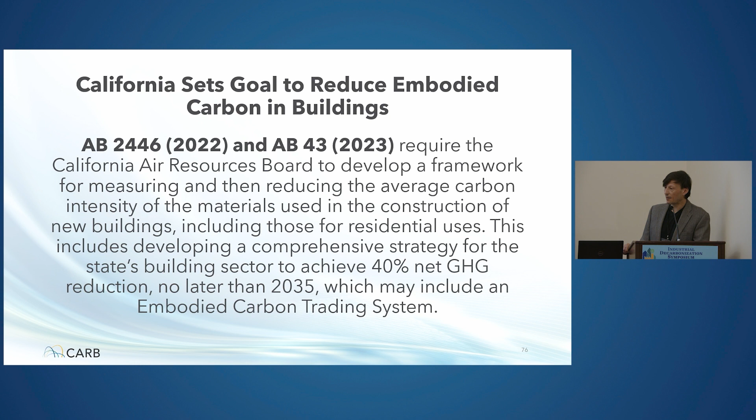In the last 2 years, the legislature passed 2 bills which created some broad authority and goals for the California Air Resources Board to develop a framework for measuring and then reducing the carbon intensity of building materials across the state. As part of these legislative mandates, it includes a target for a 40% net reduction in greenhouse gas emissions no later than 2035. Some pretty ambitious goals that we're currently looking to implement.

California has adopted a number of ambitious goals for reducing greenhouse gas emissions, and these trace back to landmark bills, Assembly Bill 32 and Senate Bill 32, which were signed in 2006. Recently, there has been direction from the legislature to develop strategies and approaches to reduce emissions affiliated with building materials and the built environment, which includes Senate Bill 596, the net zero emission strategy for the cement sector, which I believe one of my colleagues will be talking about at a later session.

In general, just to ensure that these long-lived products and materials are selected based on low carbon aspirations. So I'll give a quick update.

We're developing a team at CARB right now to implement the goals of AB 43. We have had 2 new sections created at CARB, and I'm the lead staff in one of those. We're in the process of recruiting and staffing right now, so we're just building up this spring since we've started hiring in this direction.

We're currently developing a reporting tool which aims to collect data on building materials and carbon intensities, as well as other data on construction activities statewide. We also have 2 research contracts currently underway, one with some colleagues from UC Santa Barbara and another one that's going to be starting here with some colleagues in the room.

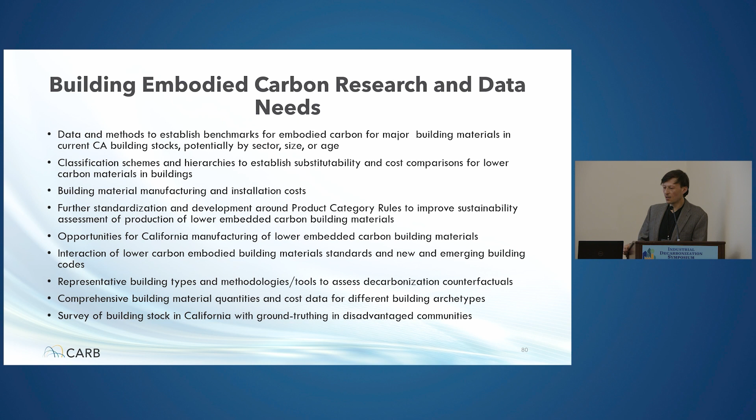We've been meeting with a number of our sister agencies, as well as some of the national labs on their work developing reference or prototype building models. So we're very interested in that work as well. Not a comprehensive or exhaustive list, but hopefully some ideas for folks to take back. We are going to be actively developing additional research contracts, and these are some of those areas of need that we're really interested in.

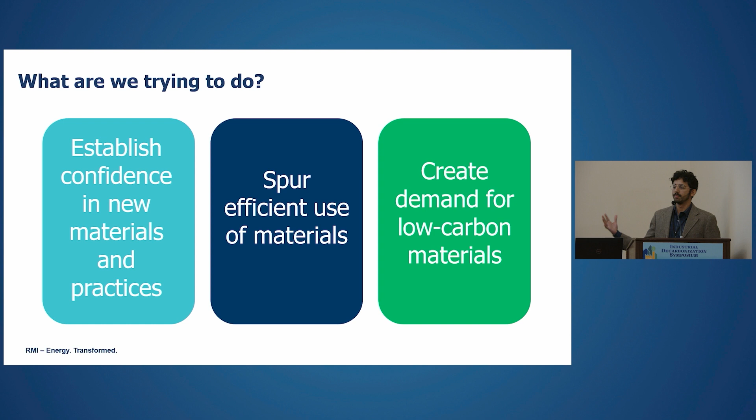The second is spurring efficient use of materials. There's a lot of waste going on in the construction industry today in terms of the amount of materials we're using, so we need to create ways to make materials used more efficiently. And the third is just to broadly create demand for low carbon materials that will be coming out of industrial plants.

So I'll walk through how we look at this at RMI from a policy and market development framework. When we're talking about that first category, which is emerging solutions, how do we get people comfortable and confident in new technologies? It's about demonstration projects — how can we support pilot projects either in the public sector or in the private sector, testing labs, funding to support testing of new materials that meet industry standards for what can be applied in construction projects. And then the third is how do we tie this to economic and business development, actually creating good paying jobs in our communities.

The second piece is once we get those emerging technologies out there and consider them market ready, so to speak, and they can flow into the construction supply chain, is how do we incentivize folks to use them? Because potentially they might cost a little bit more, or you might need a little bit more administrative work to actually apply those materials in projects.

So incentives such as performance bonuses to contractors who use low carbon building materials is an option, financial grants to use new materials. For a policymaker at a local jurisdiction, like a city or township, you can use planning or zoning incentives as ways to reward developers who use low carbon building materials, giving them a streamlined pathway to permitting their projects. So those are some incentives to accelerate adoption of these technologies.

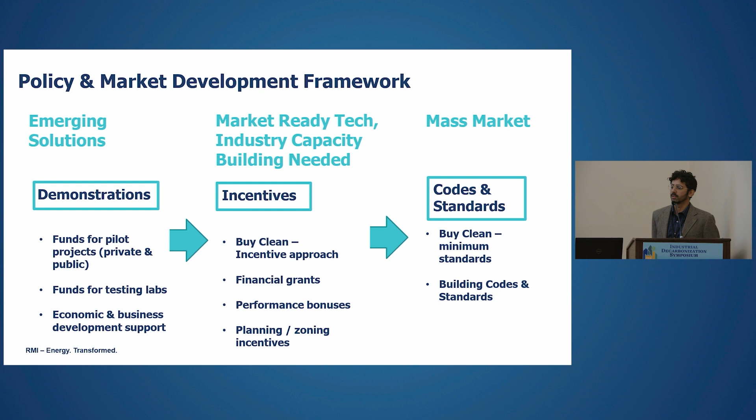But I'll leave it there at that overview of how we look at creating a market through policy and different incentive options. And I'll skip through all the rest of my slides because I don't want to take up too much time. And I'll pass it to Patrick.

So I'll do my best to stand in front of the mic. I move around a lot and I use my hands a lot. But I'm Patrick Cunningham. I work for Dr. Sabbie Miller. And I mainly look at concrete and cement, but we try to apply industrial ecology perspectives and techniques to the work we do.

So I'm going to be talking about how we can mitigate these impacts throughout the life cycle. And I want to acknowledge a lot of this work is also Josefine Olsson's, who's in the crowd, and I'll point her out again at the end too - her work as well that I'm sharing today.

So really quickly, the challenge we all know is society needs buildings, they need infrastructure, we need housing, we need roads. We also need to reduce CO2 emissions to mitigate the worst effects of climate change. And that's why I'm going to talk to you today about this opportunity to mitigate some of these impacts through reducing our material demand and through better engineering.

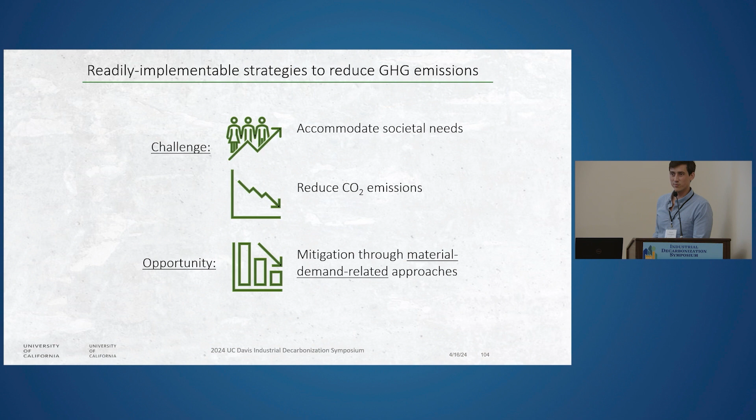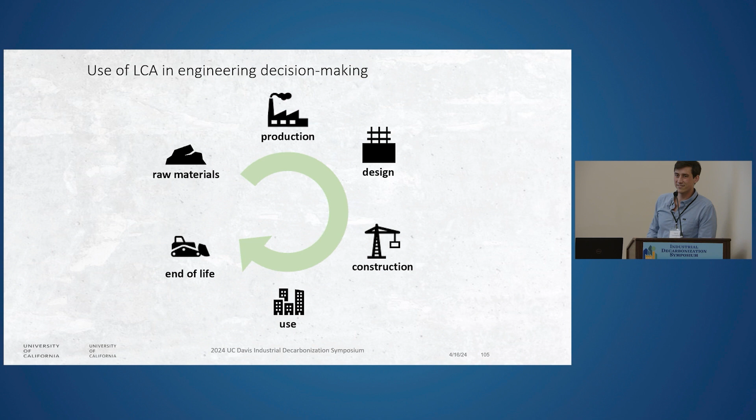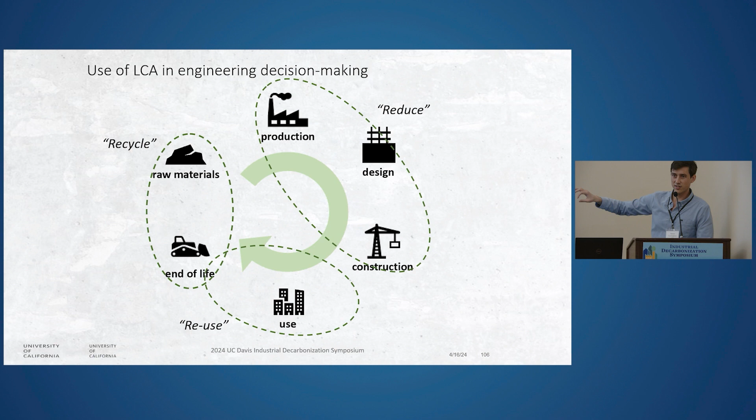So this is a very simplified plot where you can see the green arrow going from raw materials to production - there's a design aspect, and to construction, use, and end of life, which is the cycle we have right now. This is a little oversimplified, but the way I like to think about it is we have opportunities to reduce impacts or reduce consumption and reduce impacts that way. We can reduce impacts by potentially reusing, whether it's reusing elements or the material or the whole building. And then we also have some end-of-life options for material recovery and maybe even circling back into production.

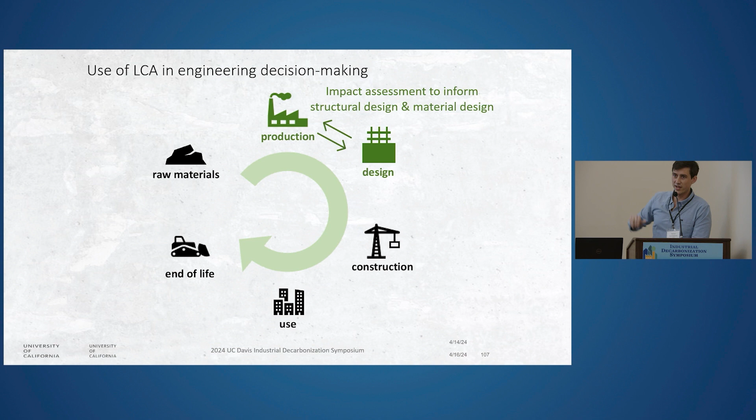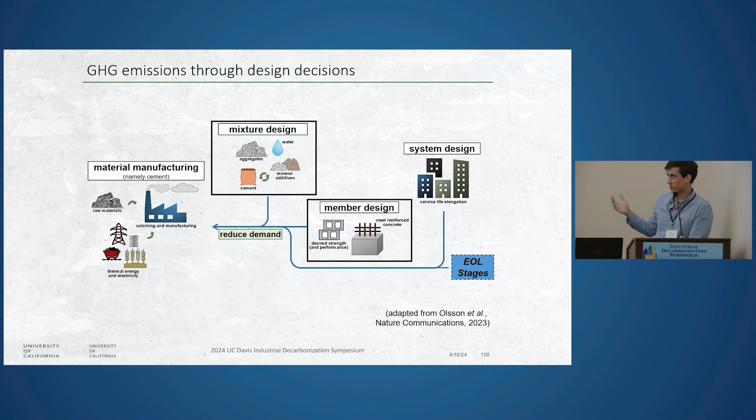And today I'm going to really focus on this opportunity up at the top to reduce our initial demand for some of these processed materials. This shows exactly that by better mixture design, better member design, better system design, and different end-of-life strategies, we might be able to cause a reduction in how much Portland cement we're using, which is the main emitter of greenhouse gas in concrete.

Starting on member design, I like to think of that first because as engineers, we usually design a column or beam to do a particular thing, and we need a certain strength of concrete for that. So that kind of dictates later on our mixtures.

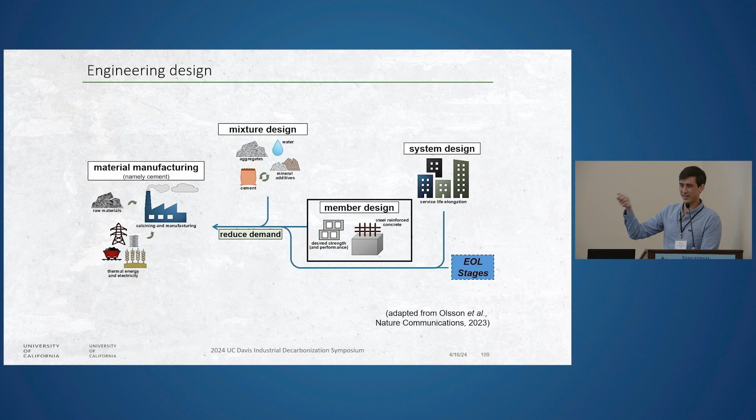Ways you can optimize your column and slab design: for the column design, higher strength concrete, a higher compressive strength, lets us minimize the rebar, and that helps reduce our impacts by almost half. Same with the slab, we minimize our compressive strength of concrete because we have tensile loads, and we increase rebar a little bit. But it enables options across the spectrum where the high end is about twice as much as the low end.

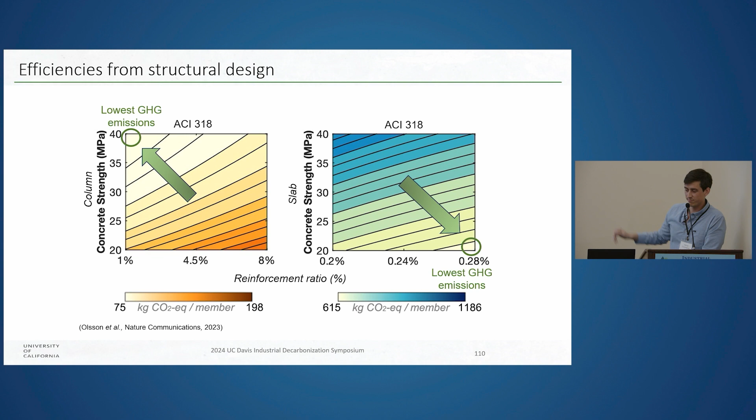So you've designed your column, you've designed your beam, and hopefully as an engineer you've given us a performance-based specification, not a prescriptive one saying use this much cement or use this mixture. That gives us an opportunity to design our mixtures.

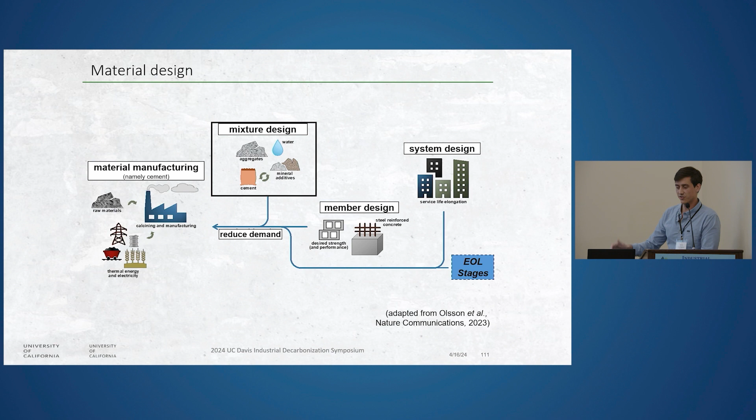With SCM reduction, you get approximately the same rate of greenhouse gas reduction. With alkali activated materials, it varies by the alkali activator, but you can really drive down those emissions quite significantly. But of course, we're engineers, we need the same performance.

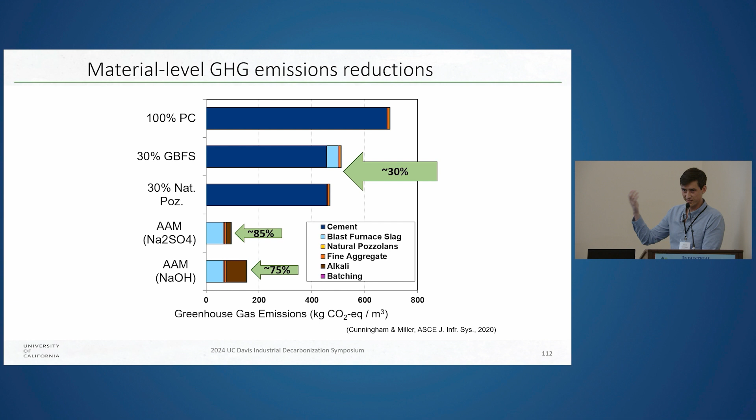When we incorporate that perspective, one simple way is looking at a functional unit where we have compressive strength versus impact. You can see that even though we really drove down greenhouse gas emissions in our alkali activated materials, some of them didn't perform as strongly. There are ways to better optimize alkali activated materials, and people have done great work on that. But this illustrates that the performance perspective is still really important when selecting materials.

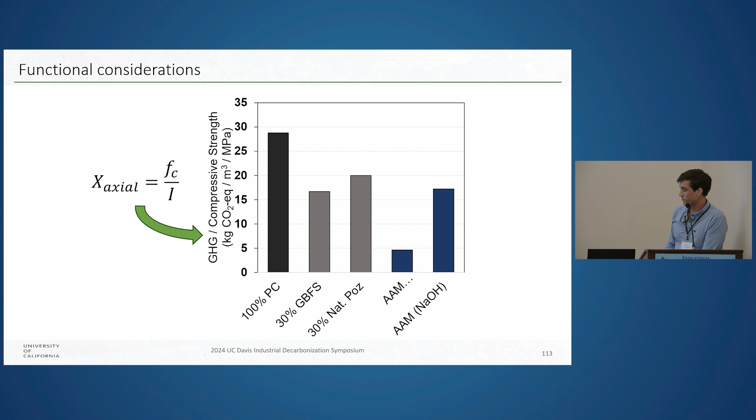Taking a step back as I finish up, if we want to incorporate all aspects of this life cycle perspective, you can see the 18% reduction is from optimizing your design, the 34% is from switching out your materials and doing better mixture design. And then if we also add improving your cement manufacturing process, using natural gas, using renewable energy and electricity when you can, plus some service life elongation from reusing your structure in place...

With today's technologies, if we pick those technologies, we can drive down 70+% of emissions from these materials. I think that's the challenge, and also a great opportunity and motivation that I'll leave you with today.

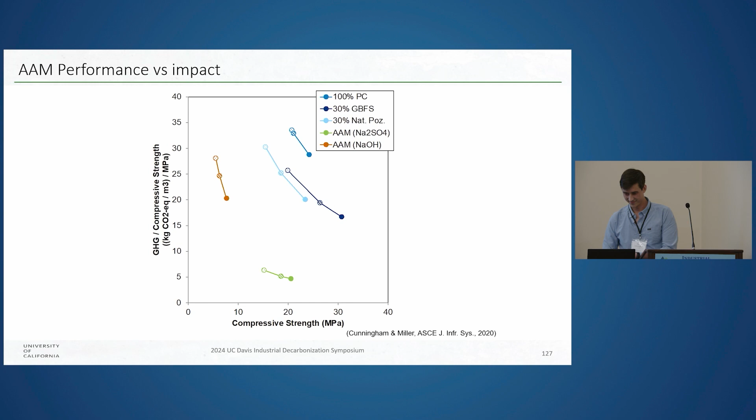So this morning, Dr. Sabbie talked about the general aspects of life cycle assessment of materials.

And here I'm going to present, dive a little bit more in depth into the methods. So I'm going to present next quantitative methods for material assessment.

As we know, life cycle assessment is the most common method to quantify environmental impacts. However, the conventional process-based life cycle assessment is very data intensive. Sometimes that data is not available, especially for novel materials or materials being re-engineered or redesigned to reduce greenhouse gas emissions.

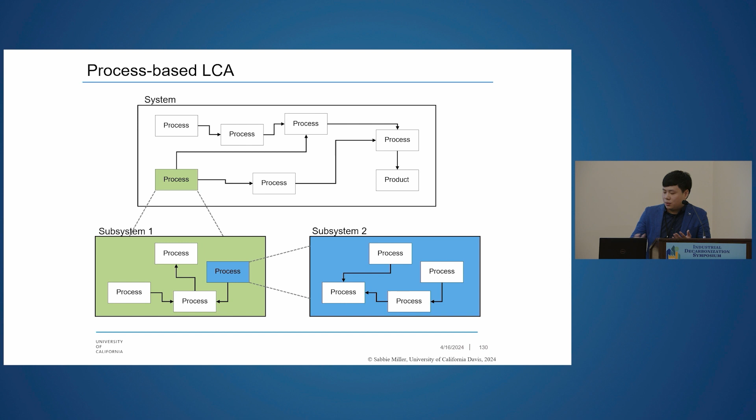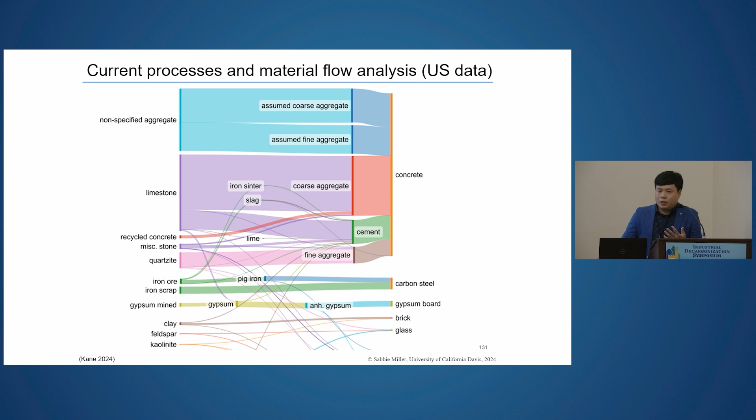To overcome the data challenges in the conventional life cycle assessment method, a first principle approach, particularly for mineral-based materials, can simplify the data needs and ensure we focus on the core processes in material production. This approach will inform direct enthalpy requirements and also consider the different stages in material production. For example, we consider mineral purity and necessary stages like quarrying of the minerals and the energy demands in the reactions or post-processing like grinding. In addition, inherent energy efficiency also needs to be addressed so we can account for the associated greenhouse gas emissions.

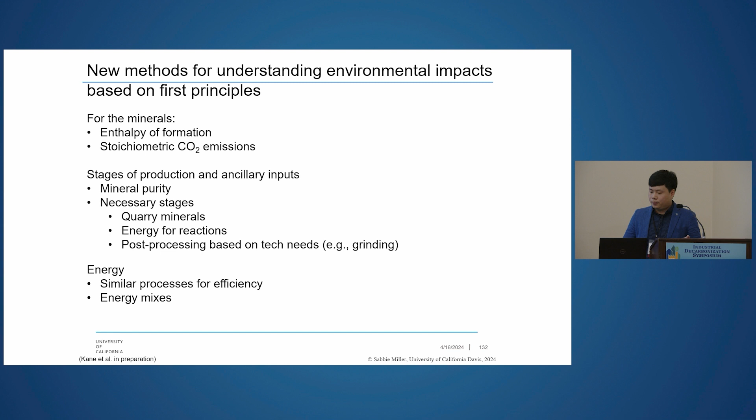Here are a few examples showing how we apply the first principle approach to characterize greenhouse gas emissions from the processes we currently use to produce concrete, low carbon steel, gypsum board, brick, and glass. The top left figure shows how we can identify the individual contributions of greenhouse gas emission from the composites of concrete, like the alite, belite, all the way to the aggregate. Similarly, it can be applied to other materials.

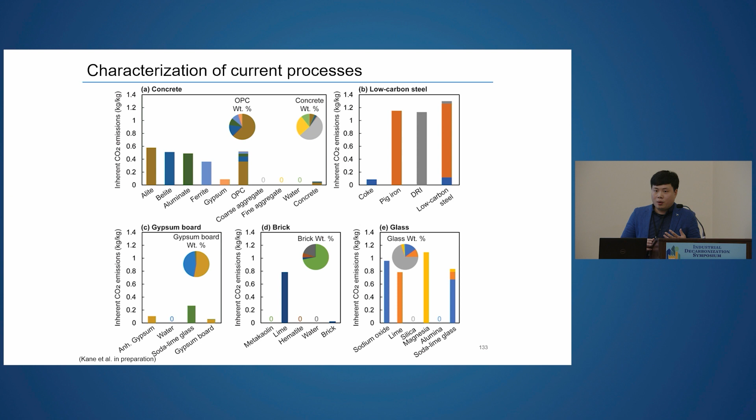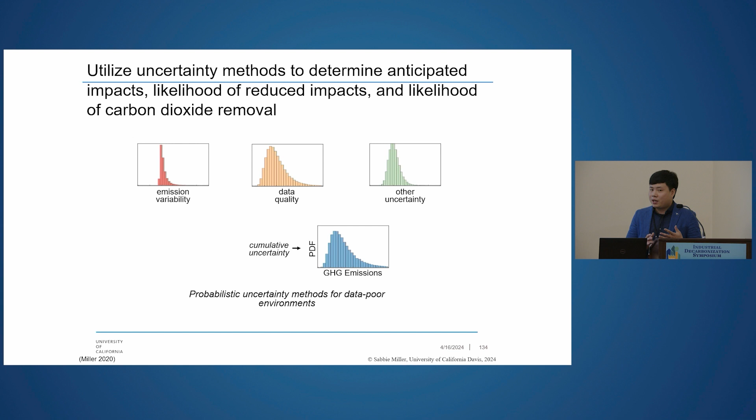In addition to those methods, we also want to make sure we consider the uncertainties in our analysis. Methods can be formulated so that we can apply uncertainty analysis to estimate greenhouse gas emissions in data poor environments. For example, we can consider the variabilities in the emissions and also justify the data quality, consider other uncertainties, so that ultimately we can determine the cumulative uncertainty to identify either the greenhouse gas emissions or other possible carbon uptake pathways, especially in data poor environments.

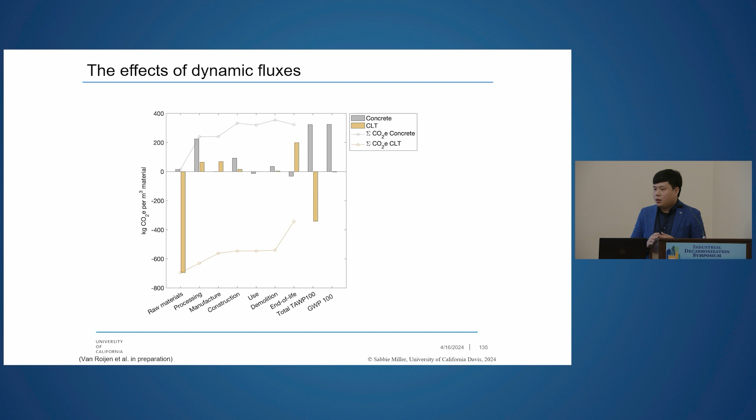Here is another concept: the timing of the emission release or uptake can also have a significant impact on the cumulative radiative forcing, and this is often overlooked. For the dynamic model we applied, we can consider the emission pulses from the manufacturing process, or the delays of life cycle aspects like biomass cultivation, or the potential decadal carbon storage in long-lived building materials, and their effect on cumulative radiative forcing. The figure here shows two examples: one is concrete, another is cross-laminated timber.

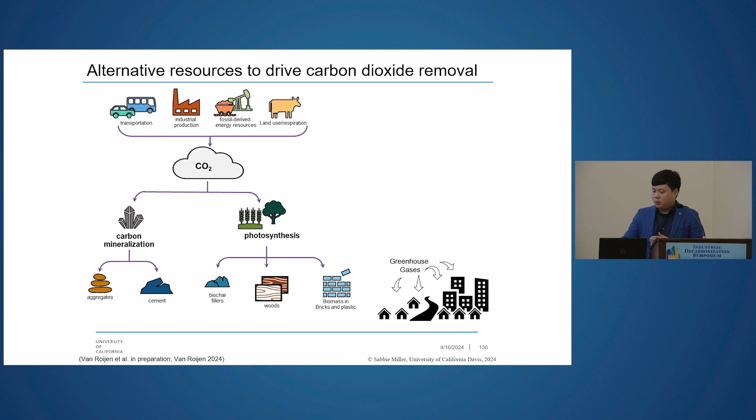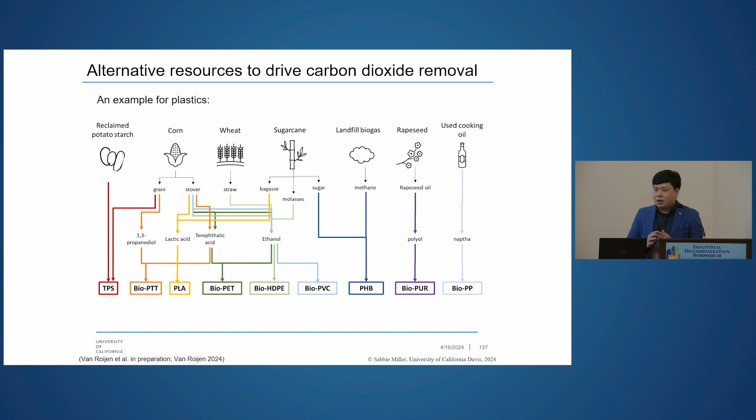And this pretty much covers the materials I want to present today. I'd like to thank you for your attention, and my colleagues Elizabeth and Joseph for some of the analysis. Thank you.

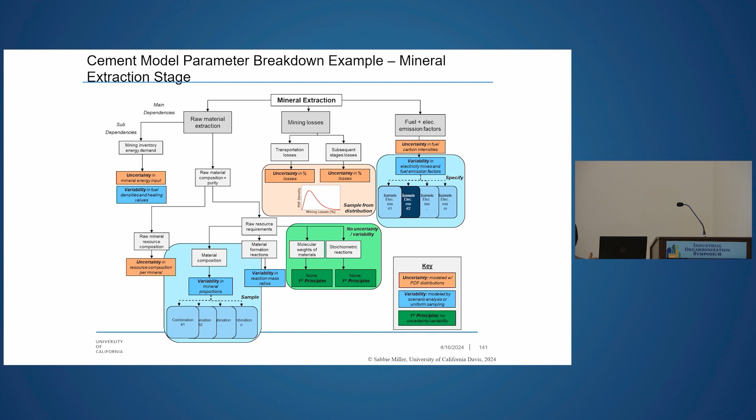All right, thank you very much for the opportunity to be here today. So I am at the University of California Pavement Research Center. We're about 85% supporting Caltrans, about 15% supporting Federal Highway Administration and Federal Aviation Administration. I wanted to put our other tiny center up there, the City and County Pavement Improvement Center.

Anybody here from local government? Okay, local government uses 50% of the asphalt materials in the state, and yet we call them the forgotten 50%. So I think I'm gonna make a few key points I'm gonna bang on today. One of them is local government.

Okay, so pavement, who cares? As Tim Greichert said, most people care when they call because there's a problem. We don't get many calls saying, hey, that was a lovely pavement I rode on today or walked on today. Thank you, thank you, thank you.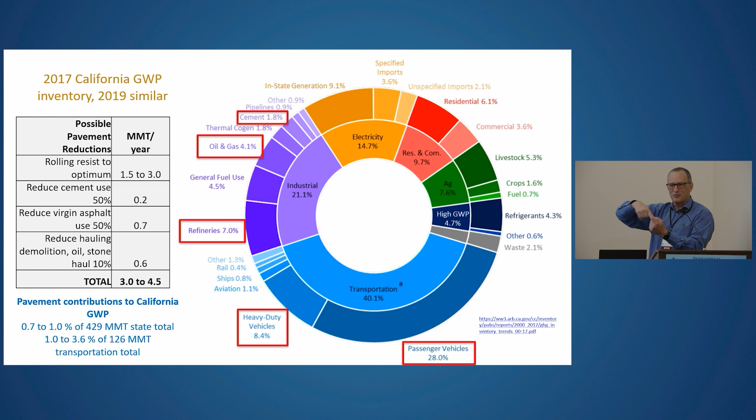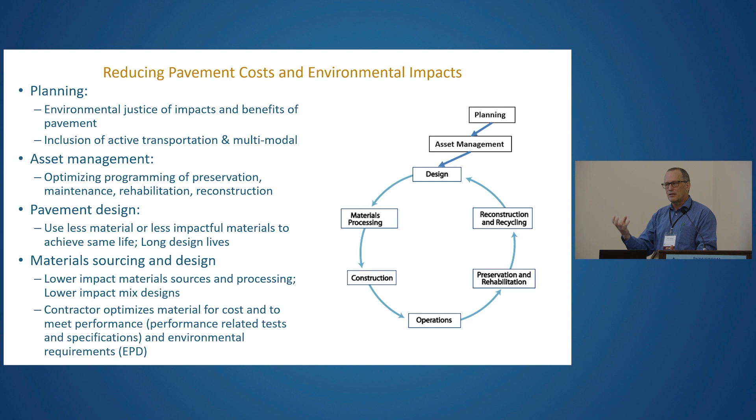Asset management, this is one of our biggest areas. This is the programming of preservation, maintenance, rehabilitation, and reconstruction, optimal timing of that, and selection of high-level strategies. Pavement design - figuring out how to use less material or less impactful material to achieve the same life or longer life. Then material sourcing and design, after the design is done, sourcing the materials that we get.

Construction, in terms of our specifications for quality control - the largest impact we can have on carbon emissions right now is better construction quality control, to take the investment we made in the materials and make it last longer so we don't have to replace it as frequently. So construction quality control, another forgotten area, particularly for local government - through our local government center, construction quality is highly variable. And again, 50% of our major material use.

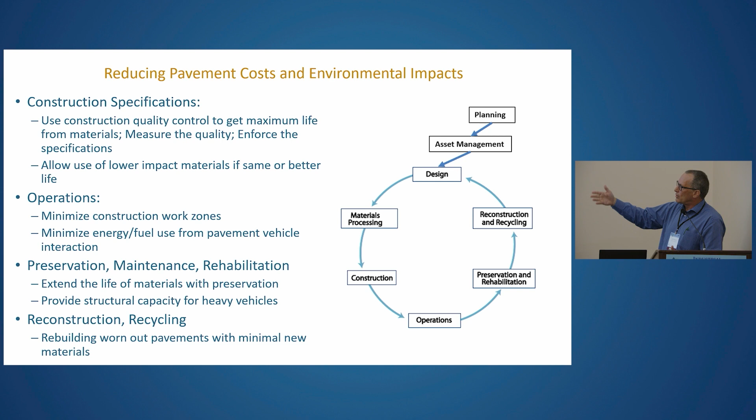Operations: minimizing work zones, which have some small impact, and then the materials and so on that we use in the preservation, maintenance, and rehabilitation.

So we put together a pavement lifecycle assessment framework in 2016 for the Federal Highway Administration. One of the key points - out of that we then wrote a state project-level program called eLCAP, which we're currently converting to the Federal Aviation Administration project-level lifecycle tool. A key point on this is, well, the top three things are data, data, and data. The entire low carbon transportation materials program in California and at the federal level is built on EPDs. EPDs need good data, otherwise what do those numbers mean?

We have two sources. We have private providers - cost a lot of money, and they control our use of the data. We're not allowed to let you use our project-level tool unless you're Caltrans or UC, because the company we bought that data from has not honored the second and third phases of that contract. So they own us. The public data has no public investment in it. The Federal LCA Commons - almost no investment.

Where I'm going to advocate right now that you write your congressman. I've met with my congressional staff in Washington to advocate investment through the national laboratories, through the federal departments that are a part of this, to build that database out, because we are standing on feet of clay here with regard to our whole low carbon materials program.

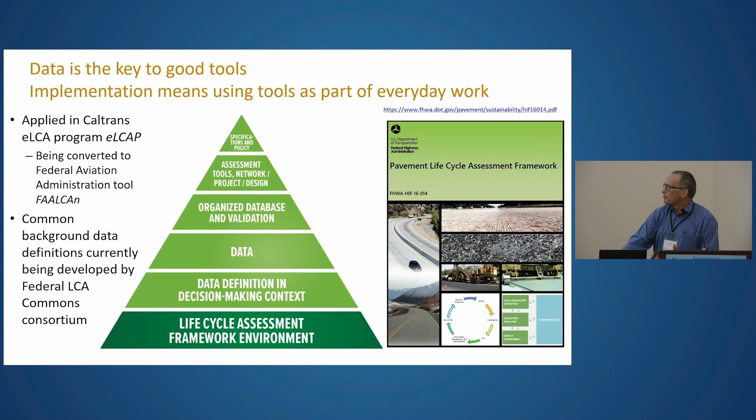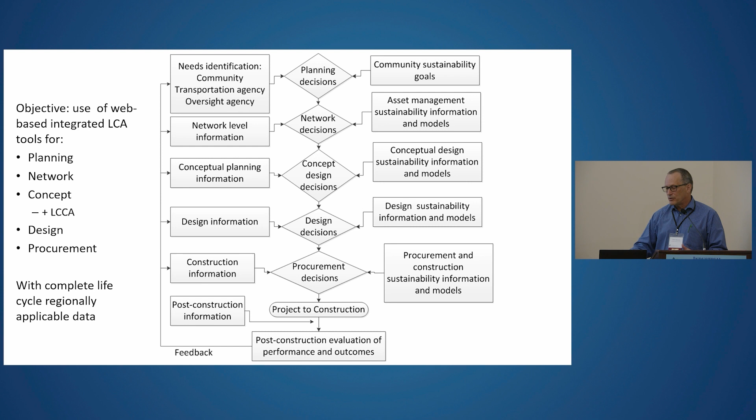So the tools we're looking at are planning level, environmental LCA, and social LCA. We've made beginnings on that.

Our main tool is the global warming potential calculation we implemented in the pavement management system that Caltrans uses, in 2012. On their 40-year projections for network level investment in rehabilitation and maintenance, they calculate the cost and the global warming potential, considering both materials and construction and pavement vehicle interaction. So that's integrated in the asset management system.

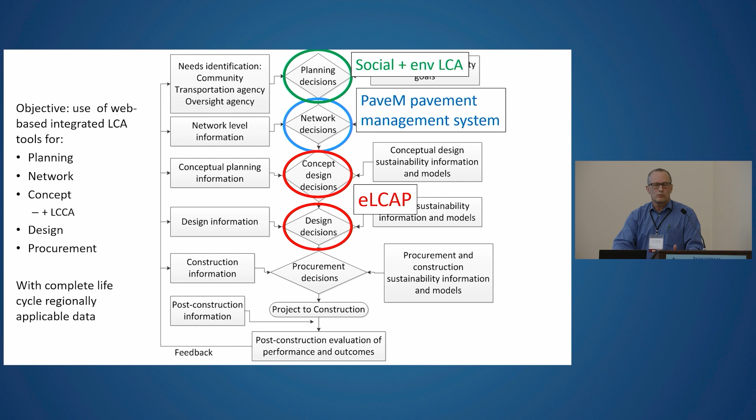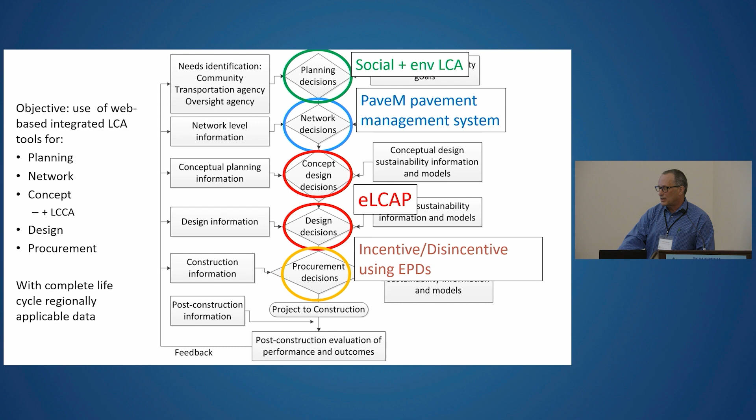At the design stages, we used our project level tool, which is being implemented by Caltrans. It's probably going to be written into the highway design manual, the thou-shalt process that Caltrans engineers and planners use within the next 2 years, I believe. And then EPDs are our tool at the procurement stage. We've written a white paper through the National Center for Sustainable Transportation recommending how to most effectively use EPDs in transportation. This is a very big diagram, and I hope these slides will be available later.

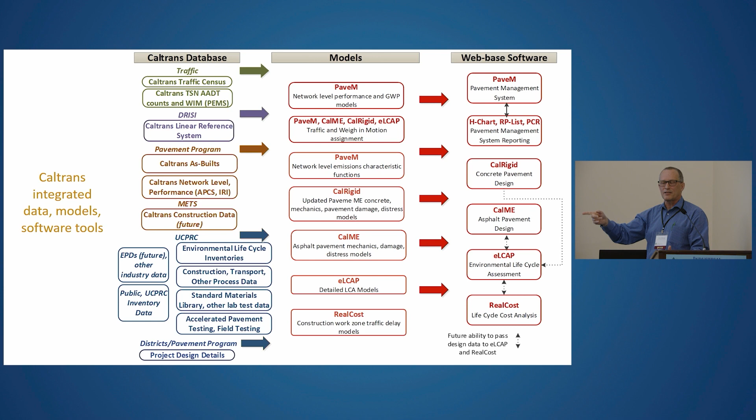The next step is to integrate the design programs so that when you produce the design, it gives you the life cycle cost and the life cycle assessment directly. Right now, you have to go into it as a separate tool.

EPDs right now are all built around A1 through A3, which is cradle to gate of the material. That has some issues I'm gonna talk about quickly in just a second, but what we're gonna be working on for Federal Highway Administration shortly is what we call expanded scope EPDs. So we want to bring in the transportation to the construction site, the construction processes. We want to bring in the life of the pavement through construction quality standards and be able to model life back into the life cycle global warming potential.

And then contractor also controls smoothness, so that extra vehicle fuel production—we want to bring the models that we have in the pavement management system into the EPD, so that based on their smoothness, we can account for the improvements in vehicle fuel use while we're still burning fossil fuels.

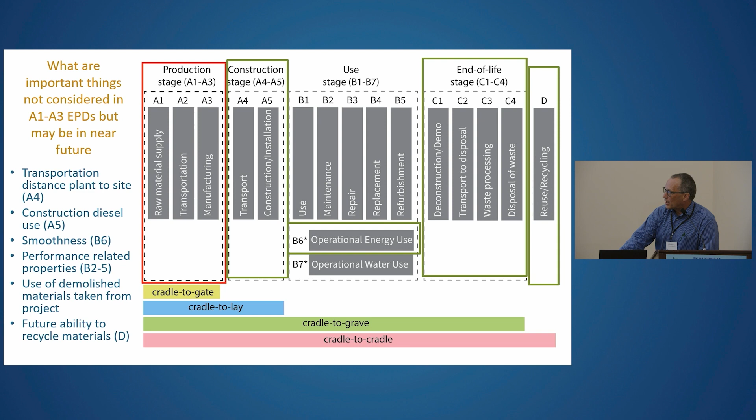How many are aware of the low carbon transportation materials program, just announced in March, about a month ago? It's $1.2 billion to state DOTs to use low carbon transportation materials based on A1 through A3 EPDs. Once that's done, in a couple months, they're gonna roll it out to local government. And then if there's any money left over, they're gonna roll it back for the second round of state government.

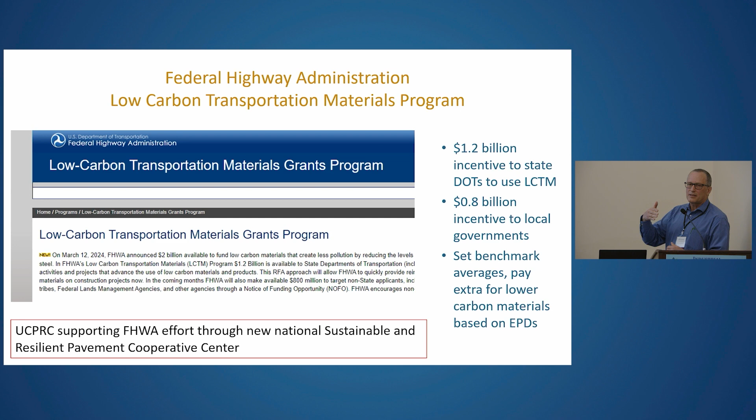We're supporting that through our new National Sustainable and Resilient Pavement Cooperative Center for Federal Highway Administration, supporting industry on setting their benchmark values and then identifying the processes for paying the incentives that will come to them.

Performance is incredibly important, as has been talked about by a couple of folks. This is a typical asphalt mix, embodied carbon cradle to gate for a typical national asphalt mix—plain Jane asphalt mix, 95% aggregate, 5% binder. The blue part is the asphalt binder, and it is more than 50% of the global warming potential.

Asphalt Institute is working on an EPD program right now. Right now we use one number regardless of what the asphalt binder is. So the asphalt industry is stepping up, the first sector of the entire oil industry to do that, and there was a little bit of fighting in the corporate boardrooms.

So what's the incentive for cradle to gate based on this, reducing our global warming? It's to drop the asphalt binder content. What does that do? It shortens the life of the pavement incredibly.

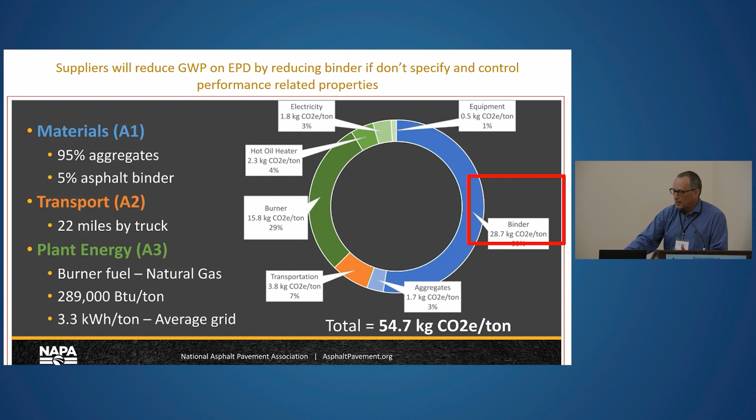So basically, under the current incentive program, we're gonna get into a situation like this, where maybe we have 15% low global warming potential for material A, but it lasts 15 years, and we have a full set of global warming potential for material B. Over a 60-year life cycle, the low carbon material becomes the high carbon material.

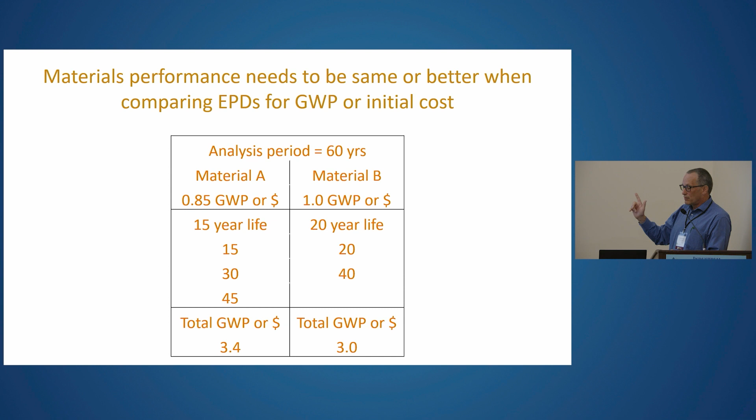This is what we've got to move to: performance-related standards for transportation materials. That's what we're working on right now, trying to get that implemented for asphalt, particularly in California right now, and across the country.

Okay, finally, great talk on supply curves. I've seen them in a couple of the presentations. We strongly advocate this, basically prioritizing what we do.

Unfortunately, in pavement world, because not many people know that much about it, what I call crazy, sexy, cool ideas, which we don't know really whether they reduce global warming potential because it's never been quantified and often massive cost, are what are getting prioritized and not the simple nuts and bolts, everyday stuff that we need to do.

One of the things we've done, an initial study, we came up with about $15 per ton of marginal abatement cost for optimizing smoothness. That's a pretty darn low cost of optimizing carbon. Some of the recycling strategies are actually in the negative part, which is where we really want to be. All right, thank you.

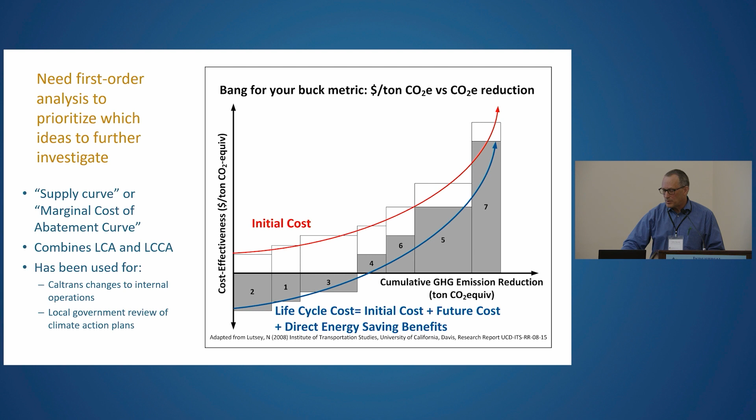All right, thank you for having me. I'm Tommy. I'm up at LBNL, just down the street, I guess.

So today I'll be talking about a synthesis of what all the other presenters really talked about. This is work in progress that's internally funded at the lab. What we're working on currently is thinking about, across the building materials sector, how we can put together different existing LCA models and tools to build a more streamlined, integrated tool that works across those different sectors, whether it's transportation, end of life, waste management, production, or other decarbonization technologies, to put it in one place.

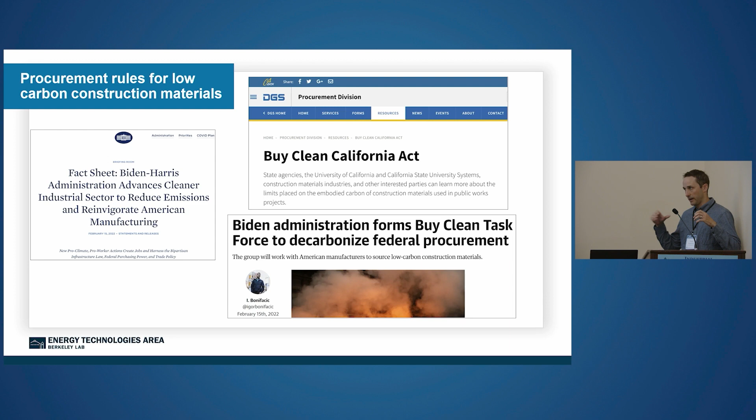I don't really need to go through these policies, you've gotten a great background from the other panel members, but a lot of this research is motivated by working with our DOE partners and others to think about how we can support these different Buy Clean initiatives, EPDs, and a range of stakeholders who need analysis support in a lot of different ways to be able to implement these policies successfully.

So the key research questions we're working from: how can we set up life cycle models across very diverse supply chains, considering regions, communities, different temporal scales, whether daily, seasonal, monthly, how emissions change, and how that changes with different technologies being used at the facilities. Really the driver in a lot of these talks was electricity or energy or processed fuels being mixed and used on site. How do we consider all those different variations across the supply chain and put it all together in one place for building materials?

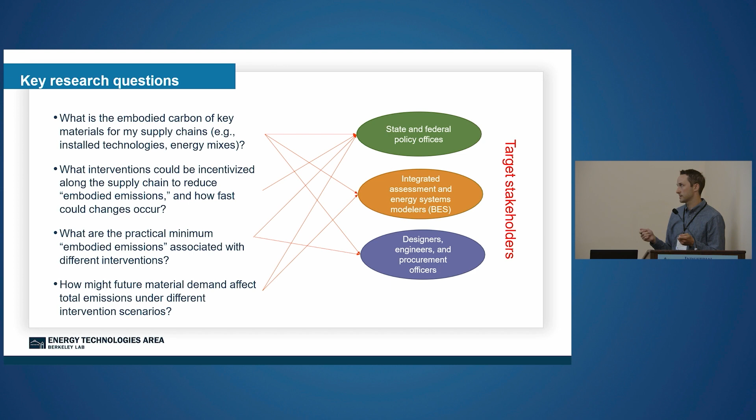Then thinking through what GHG mitigation actions or interventions we could take to really lower these embodied emissions for a specific building material. Then getting down to the practical minimum, what's feasible for these different building materials, and a key aspect to this entire effort is coupling it with a building demand or material demand projection. Using what's out there, some great work at NREL and other places, to build out what something looks like for cement or steel or elsewhere in the residential or commercial sector, what that demand looks like, maybe even considering things like demand reduction in design and how that affects our life cycle models within the rest of the model.

So visually, where we are now is building out those demand projections and also putting together this integrated model across the supply chain, considering a lot of different variations. This is really, really difficult when you start to think about building on the research we saw for something like concrete or pavement, and getting it down to a regional level or facility level where we're starting to think about different temporal scales or technologies.

Moving forward, thinking about what greenhouse gas mitigation actions can be taken, and putting this all in one place where we can support policymakers, industry that are putting together EPDs trying to make it very accurate at a facility level. So we don't just have the one number that we just talked about for pavement or something like that. Really trying to put this in place so we can implement something like Buy Clean accurately, which, as we just heard in a lot of talks, faces a lot of challenges with data, but our goal here is to chip away at the problem, and also build a tool that can be used by a lot of different stakeholders.

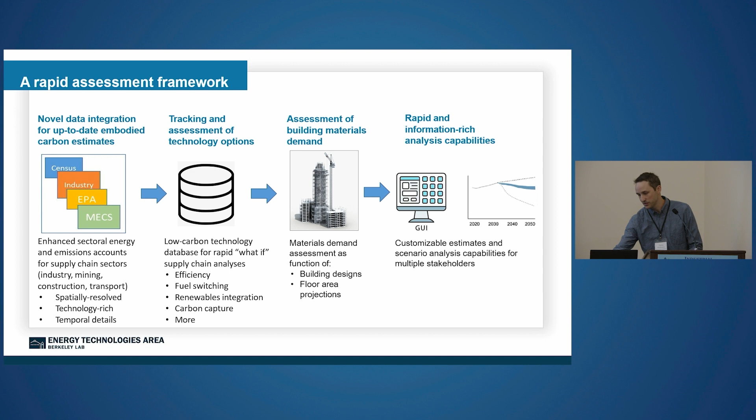So I'll end it there. I'm not sure, do we have much time? We have a little time, okay. Thank you so much.